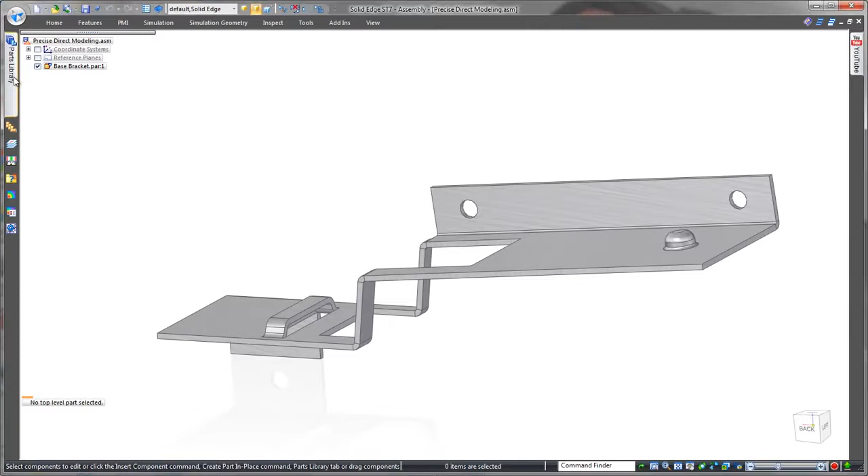First, let's bring in our spring clip and assemble it with the parts it was intended for: clip to the base, and the USB block it needs to hold.

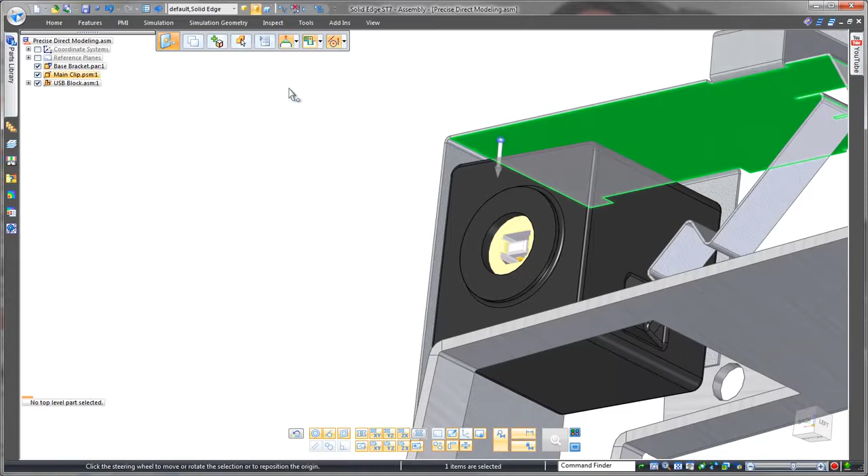The first precise change we need to make is to close up this gap between the top of the USB block and the spring clip. In most any other CAD system, you'd have to make this change at the 2D sketch level with sketch relations. In Solid Edge, we can simply relate faces in 3D instead.

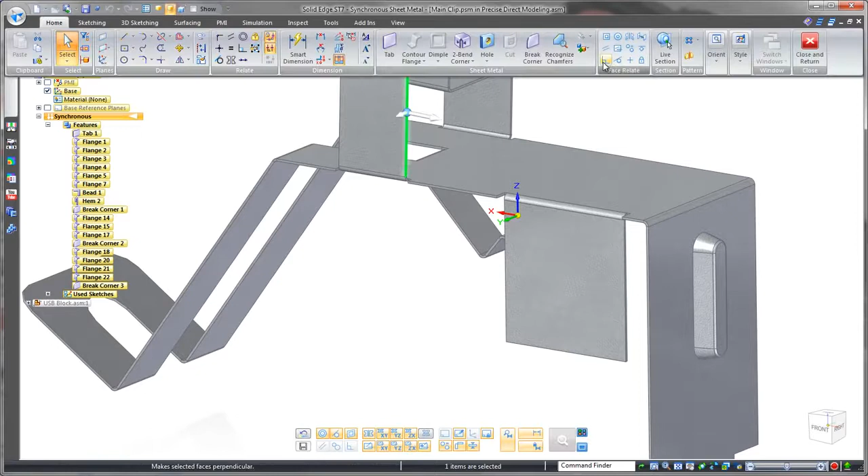Easy. Looking at the back, I noticed the tabs on the top are not quite square with the top face. No problem, a couple more 3D relations will fix this: for the side faces of the tabs, making them perpendicular to the top, and for the top faces, making them perpendicular to the side. Notice how both tabs are being updated here. That's the intelligence of synchronous technology.

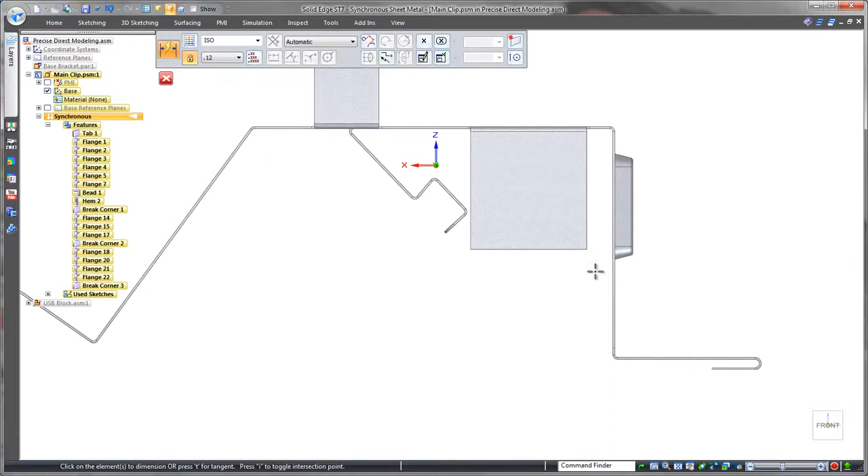Let's start detailing this model. And of course dimensions are key. Solid Edge has two main ways to dimension. The first is like most any other CAD system, in 2D when creating a sketch for a feature. But the second, which you see here, is unlike most any other CAD system, and much more intuitive. Just dimension the 3D model directly.

We can leave this floating so that we still have the flexibility for further changes, or lock it down to be precise. We'll lock this down and we'll add another one for the flange width.

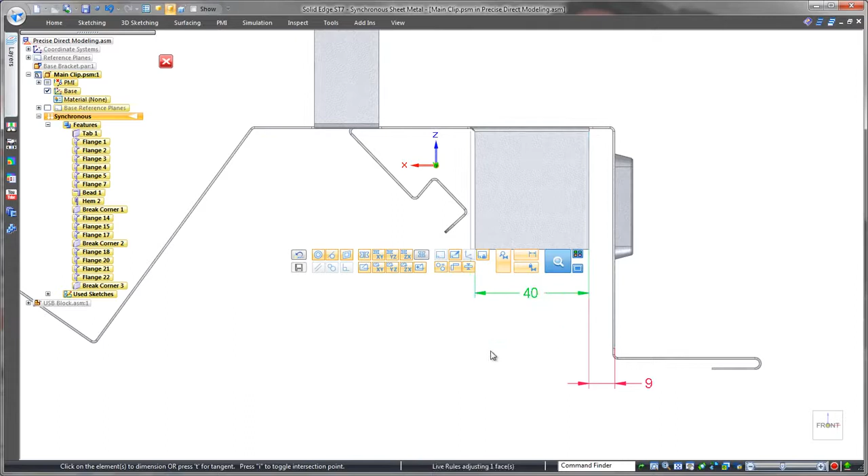We'll dimension these top tabs next, and look closely at the precise control that's provided. These green arrows allow us to control the direction of the change, which side moves and which side stays put, or even a symmetrical change if we wish.

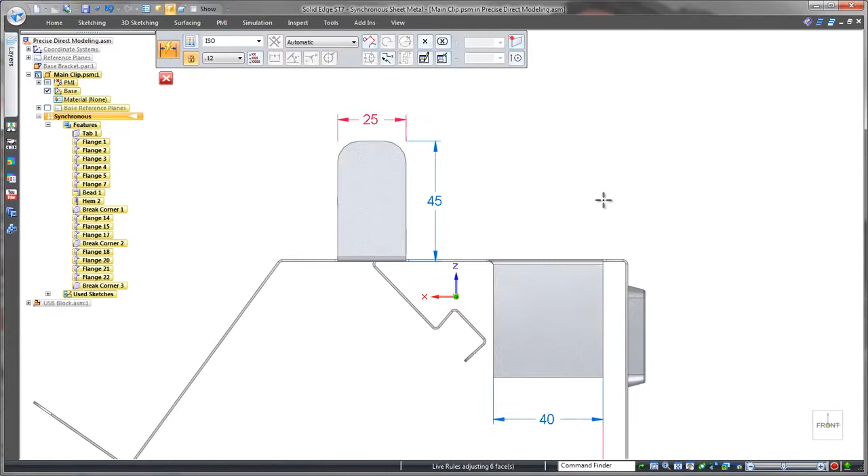We'll speed through adding the other required dimensions using the same technique, and for your information, the red dimensions are the ones we've locked down, and the blue ones are the ones we've left floating. Overall, notice how easy they are for someone else to understand. Great for reviews. Oh, and of course, we're not just talking linear dimensions, let's detail the angle here too.

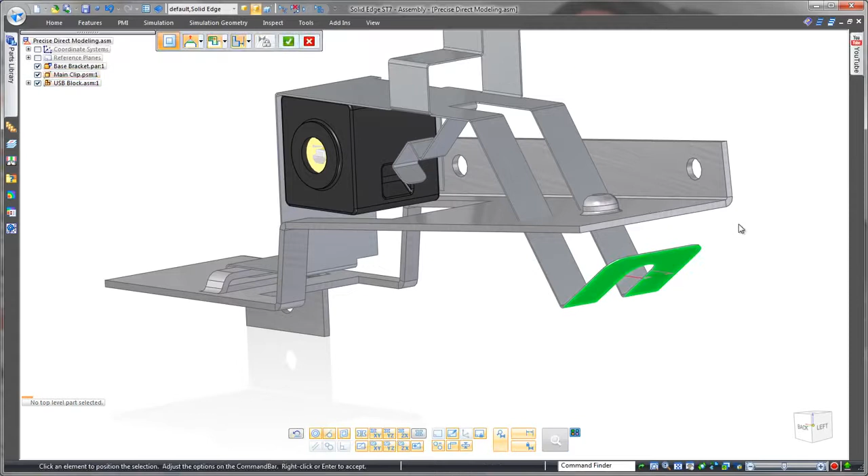We should finish working on the other end of the clip. Another 3D relation will do the trick to move and match the angle of this piece. And we can use what's called the steering wheel to drive a synchronous drag and snap into place here, and let's make sure that the whole thing is assembled centrally.

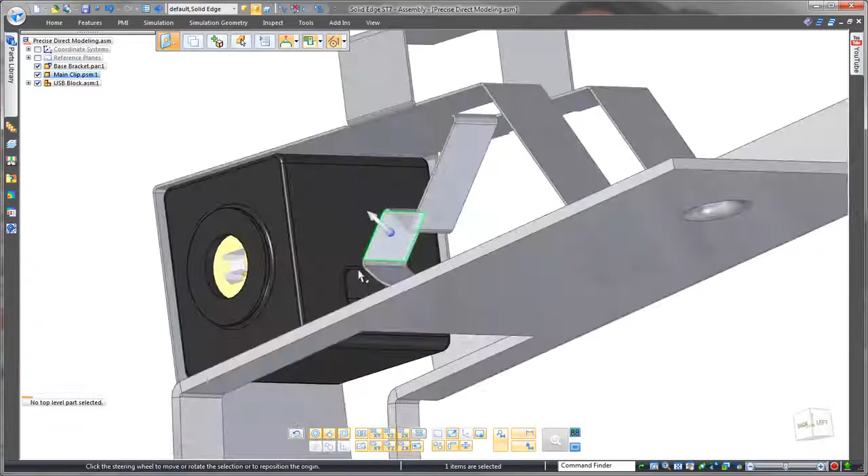Next up is the retaining clip that needs to slot inside the groove of the USB block. Once again, an easy face relation, or steering wheel drag and snap can be used. Whatever's easier.

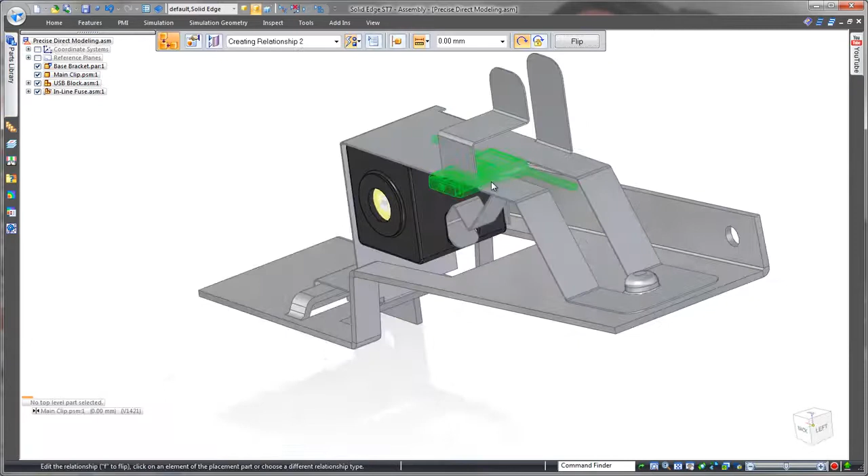Perfect. One last subassembly to bring in an inline fuse. The purpose of the top tabs are to support this, so we need to make sure it'll fit tightly into place. So let's make some more precise direct edits.

Now I know the wire diameter is less than 10mm, so what we can do is drag the steering wheel to create a 10mm offset before dragging and snapping the tab itself. This leaves us with a 10mm gap, precisely how we want it. Let's drag this section in too, up against the fuse.

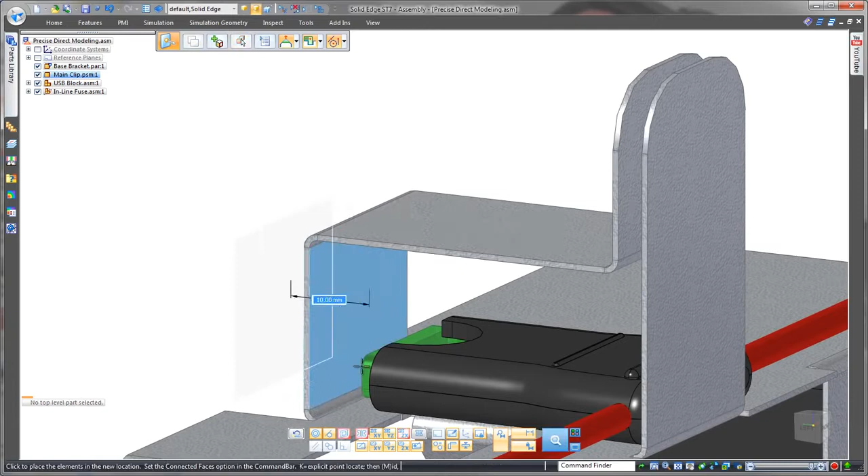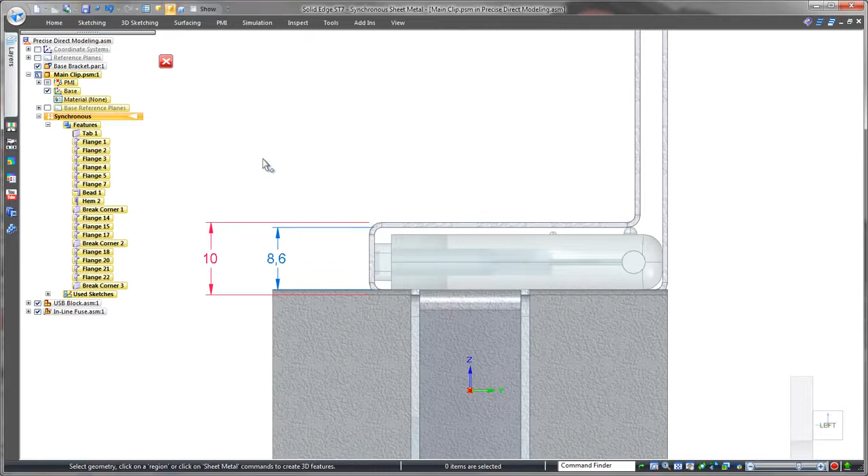Something worth noting is that for sheet metal dimensional control, we can design to either the outside or inside. It doesn't matter which dimension we change, be it inside or outside - Solid Edge will always take into consideration the material thickness.

Design complete, and of course it doesn't stop there. We can take this same all-in-one concept from final model into a manufacturing drawing.

First of all, let's create a custom view of the assembly so that all aspects of the part can be seen. Let's have that shaded, and a few views of just the clip.

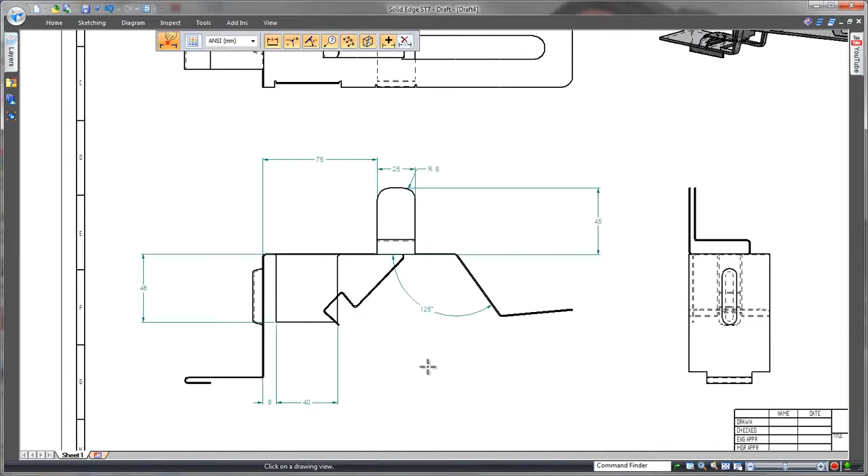And remember the 3D dimensions we added to the part? Look how quick we can bring those dimensions into this view.

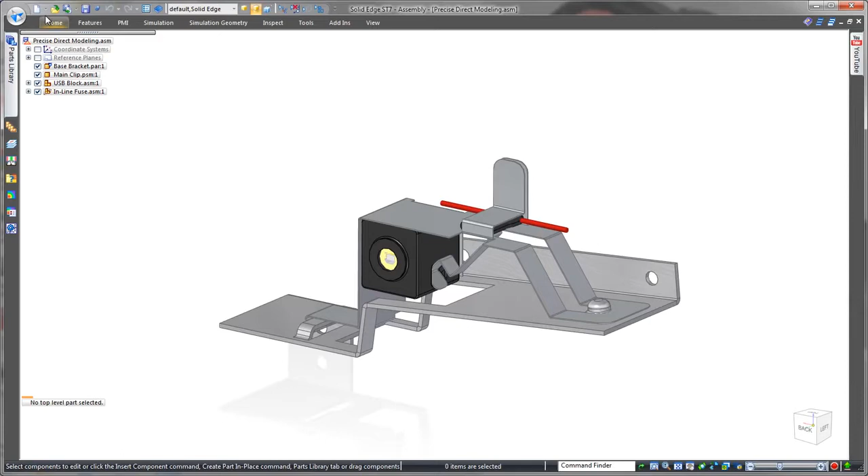So in summary, we've seen how Solid Edge with synchronous technology provides rapid direct modelling, but importantly with precise parametric control: relating faces, dimensioning, detailed drag and snaps, all in 3D, no sketch work in sight. Fast and easy, but most importantly accurate. Solid Edge, design better.